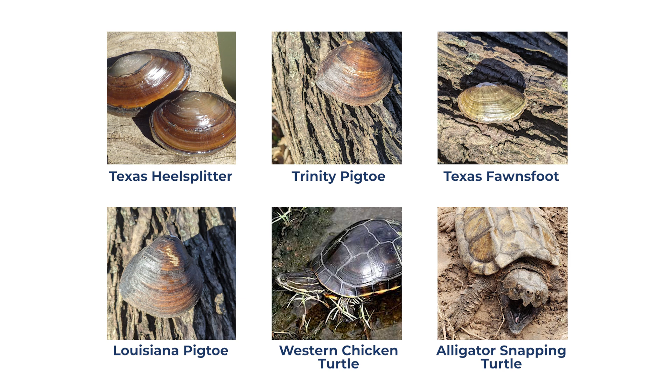Currently, 4 species of freshwater mussels and 2 species of turtles have been identified in our basin. Also in 2024, the U.S. Fish and Wildlife Service approved a Candidate Conservation Agreement with Assurances, or CCAA, and an incidental take permit for these species. The Trinity River Authority serves as the permit holder, and the NTMWD operates under Certificate of Inclusion. This 10-year agreement provides legal protection for our routine operations and maintenance activities. In return, we've committed to implementing specific Best Management Practices, or BMPs, designed to protect and conserve the covered species.

In this training video, you'll learn how to incorporate these BMPs into your daily work and tasks. By following these practices, we can ensure compliance with our permit and help conserve at-risk species while continuing to deliver critical services to the public.

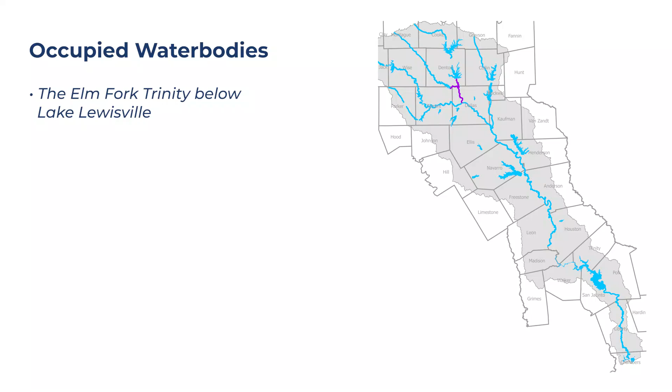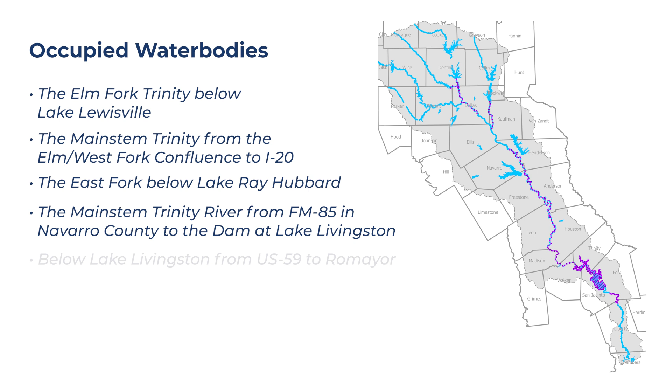Because freshwater mussels are relatively immobile, the U.S. Fish and Wildlife Service has designated some water bodies with known populations as occupied water bodies. The occupied water bodies that overlap with the covered parties' service areas include the Elm Fork Trinity below Lake Lewisville, the main stem Trinity from the Elm and West Fork confluence to I-20, the East Fork below Lake Ray Hubbard, the main stem Trinity River from FM 85 in Navarro County to the dam at Lake Livingston, and below Lake Livingston from US 59 to Romayor.

The covered species are protected wherever they occur and can be found outside of these water bodies. So please be vigilant even when working outside these known occupied reaches. Also, these reaches may change, so make sure to contact your CCAA representative to see if your duties overlap with newly occupied waters.

Covered turtles, on the other hand, are mobile, and their range is not as well defined as freshwater mussels. Covered parties could potentially interact with turtles within the Trinity River, its tributaries, or while working in the surrounding riparian areas. Riparian areas are defined as the margins of streams, rivers, or intermittent draws where vegetation is strongly influenced by the presence of water. We have highlighted some examples here.

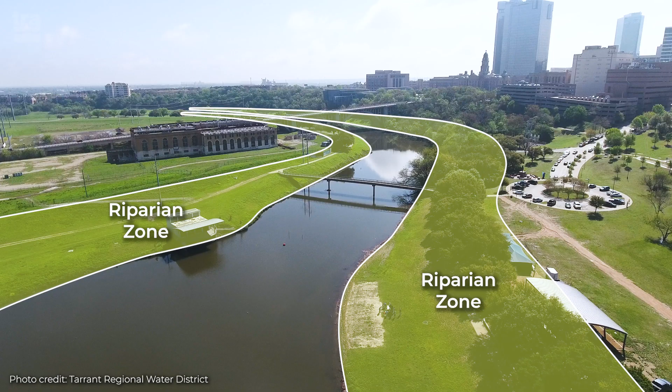The first of our covered turtle species is the western chicken turtle. It's a highly mobile, medium-sized turtle that prefers sandy wetland ecosystems. It is commonly confused with the red-eared slider in Texas, but can be identified by a single solid yellow bar on its front legs and vertical yellow stripes on its rump.

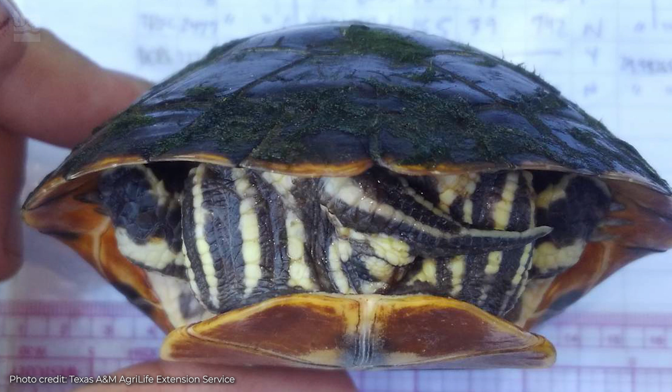The western chicken turtle can be found near water bodies between the months of February and July, but spends up to 9 months out of the year burrowed underground in sandy wetland areas.

The other covered turtle is the alligator snapping turtle. Best described as a modern-day dinosaur, the alligator snapping turtle is the largest freshwater turtle in the US and is an apex predator. Frequently confused with the common snapping turtle, the alligator snapping turtle can be identified by its beak-like mouth, spiked shell with 3 prominent ridges, and a red worm-like lure in its mouth used to attract fish.

The alligator snapping turtle spends most of its life in slow-moving water, where it has lots of structure like downed trees and root wads. But females move into riparian areas from March until May to lay their eggs.

Now that you have learned about our 6 covered species and where interactions might occur, let's go over some best management practices. The best management practices are guidelines intended to avoid harm to the covered species while facilitating your ability to complete your duties.

These BMPs were developed over the past year with input from members representing all 5 covered parties and have been approved by the Texas Parks and Wildlife Department and the U.S. Fish and Wildlife Service. It is important to remember, BMPs do not replace the need to follow state and federal regulations for your projects. Today, we will cover the Section 10 BMPs, which were designed for routine operation and maintenance activities, and the Section 7 BMPs, designed for new construction projects.

Make sure all routine operations and maintenance activities follow all state and federal regulations, especially the Texas Parks and Wildlife Department's Aquatic Resource Relocation Plans, or ARRPs, and Section 106 of the National Historic Preservation Act.

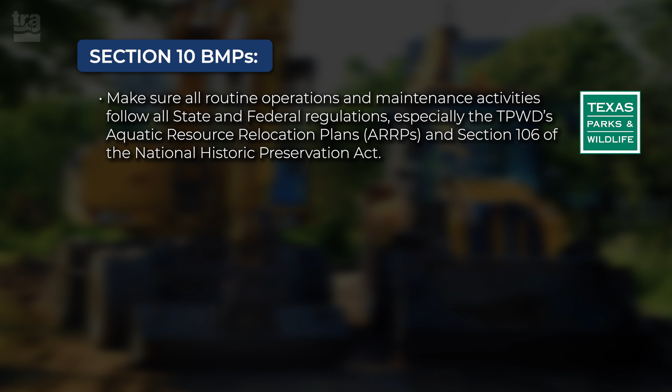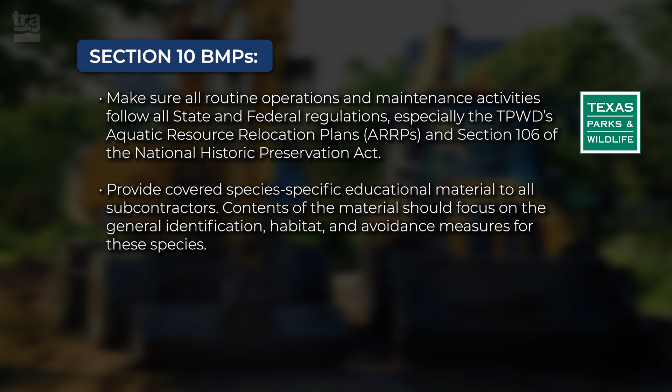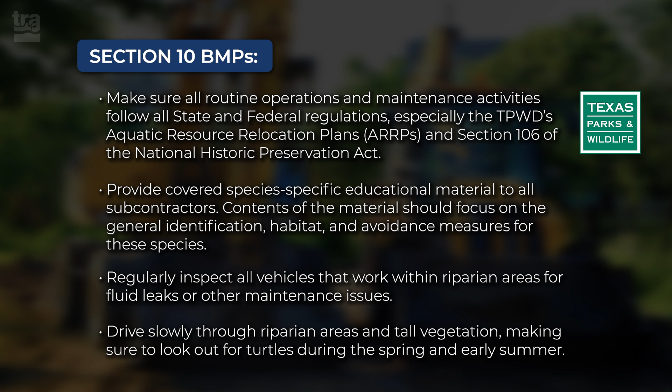Provide covered species-specific educational materials to all subcontractors. Contents of the material should focus on the general identification, habitat, and avoidance measures for these species. Regularly inspect all vehicles that work within riparian areas for fluid leaks and other maintenance issues. Drive slowly through riparian areas and tall vegetation, making sure to look out for turtles during the spring and early summer. Avoid disturbing streams or riparian areas by clearing only necessary vegetation and following proper sediment and erosion control measures.

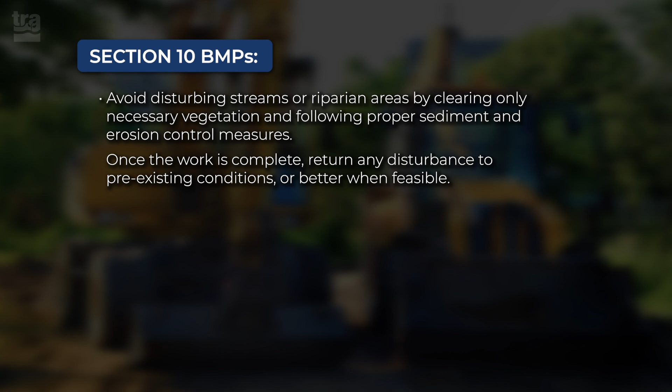Once the work is complete, return any disturbance to pre-existing conditions, or better when feasible. Stage equipment and materials outside of the riparian area if feasible, and bring it in only when needed. And lastly, make sure your coffer dam and silt fencing are made of non-toxic materials.

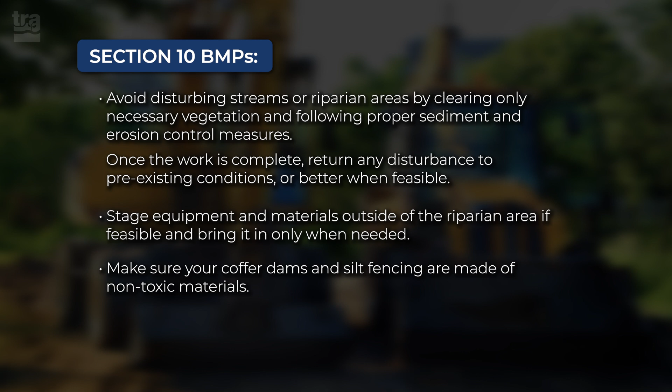Section 7 BMPs will apply to any project with a federal nexus and will generally require additional permitting through a federal agency. Any take under Section 7 is covered by a separate federal permit, not by the incidental take permit associated with the CCAA. In addition to the BMPs for Section 10, these BMPs outline additional procedures we have agreed to follow during the design and implementation phase of Section 7 projects.

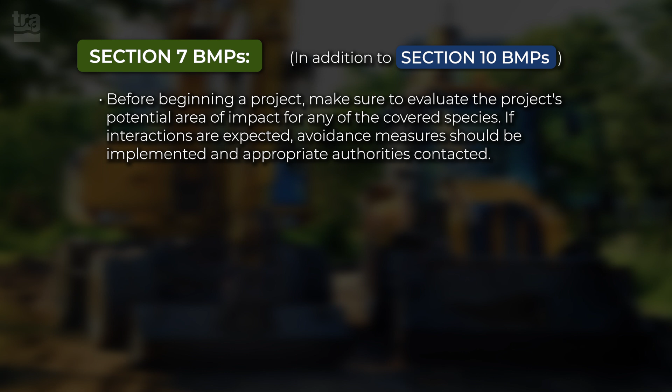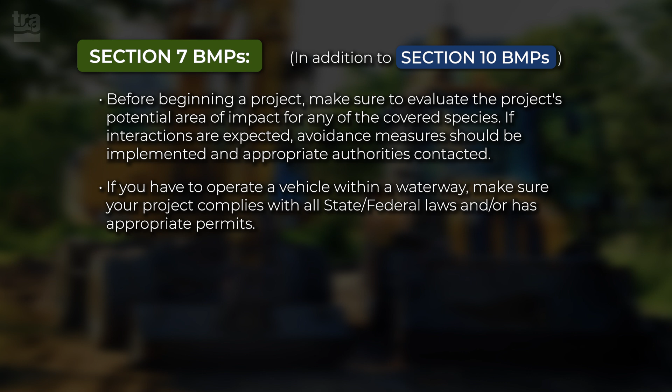Before beginning a project, make sure to evaluate the project's potential area of impact for any covered species. If interactions are expected, avoidance measures should be implemented and appropriate authorities contacted. If you have to operate a vehicle within a waterway, make sure your project complies with all state and federal laws and/or has appropriate permits. Lastly, when feasible, incorporate natural channel and riparian design elements into your projects.

To comply with our Section 10 incidental take permit, TRA must report take for all covered parties annually to the U.S. Fish and Wildlife Service. You should report any take under your routine operations to your entity's CCAA representative, who will then notify the TRA of the encounter.

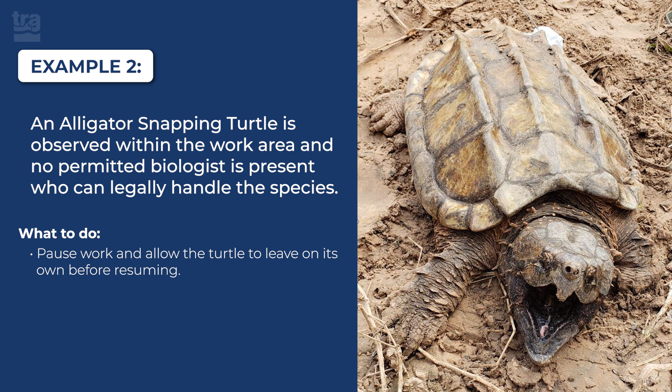An alligator snapping turtle is observed within the work area, and no permitted biologist is present who can legally handle the species. Pause work and allow the turtle to leave on its own before resuming. Immediately report this to your CCAA representative and report the sighting using the Alligator Snapping Turtle Reporting Tool.

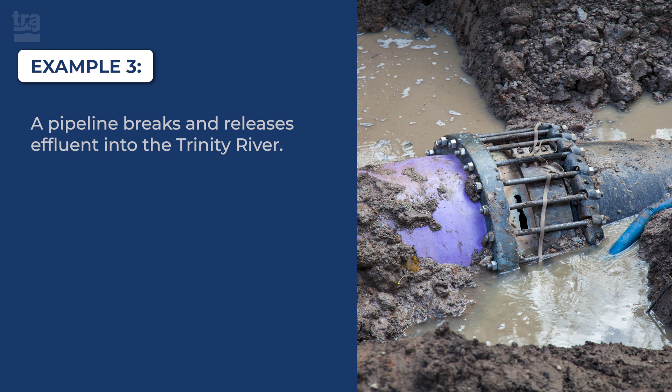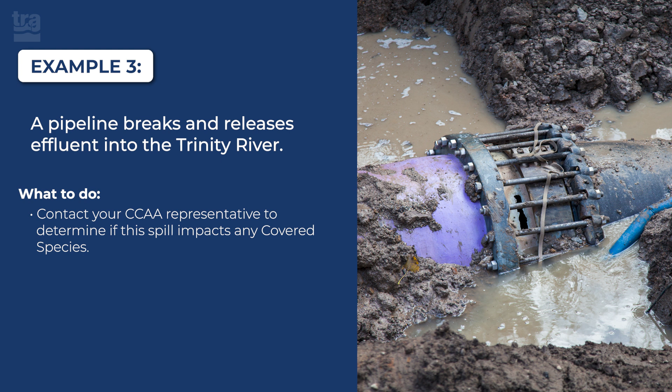A pipeline breaks and releases effluent into the Trinity River. Contact your CCAA representative to determine if the spill impacts any of the covered species. They will notify the TRA if it does need to be considered for take. Also, if the spill results in a fish kill, please contact the Texas Parks and Wildlife Kills and Spills team at 512-389-4848 and follow all normal spill procedures.

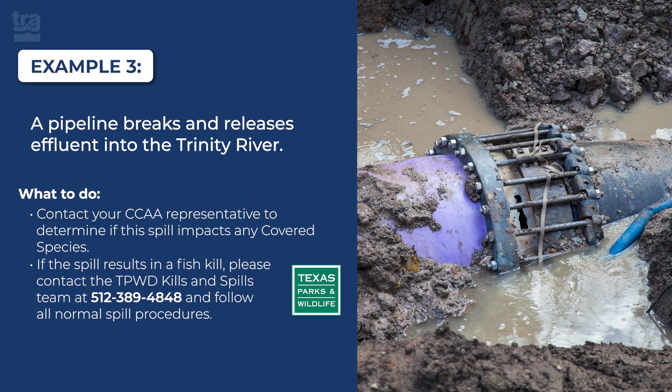Lastly, we understand that avoidance to the covered species is not always possible when it comes to your Section 10 activities. Thus, in rare instances when there is an emergency or immediate danger to human health or safety, for example responding to a broken pipeline or sewer overflow, we are allowed to temporarily suspend one or multiple of the BMPs to provide a timely response.

To reiterate, if an emergency arises, take the actions necessary to mitigate the emergency, then report what happened and any potential impacts to the covered species to your supervisor, who will then report to your entity's CCAA representative. At the bottom of both BMP documents, we have included our contact information as well as the contact information for your entity's CCAA representative to aid in reporting and to ask compliance questions.

We believe the development of this CCAA will have profound implications not only for the covered species, but for all species, while ensuring our critical water supply and wastewater operations can continue to provide for the needs of the citizens of Texas. Thank you for your time today.